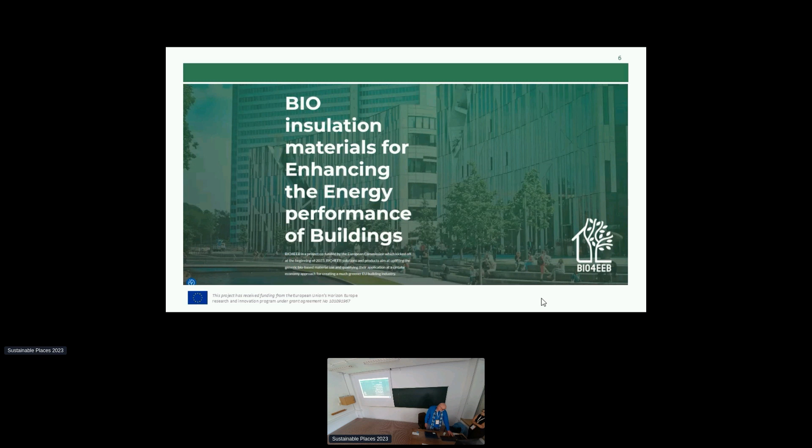The idea is to collect some products. So we have foams, we have windows out of foams, and we are working with Posidonia. Does it say anything to you, Posidonia? Okay. Posidonia is a plant that is grown in the sea between 10 and 40 meters deep. It is nature protected, which is a sort of a problem, because if you want to use it as a building material, how to do this?

Not a problem, because if you remember these old Western movies, there were always these straw balls in the wind, and they just drove through the streets. Now the Posidonia you find at beaches. You see the small collected balls. And the idea was, this material comes out of water, so it has no problem with humidity, which is interesting. If you have condensate in a wall element, for example, this is for sure interesting.

And the thermal insulation is, I would say, as good as regular material, but it's even bio-based. And if it's on the beach and not in the water, it is declared as waste. In that case, what we do here with the Posidonia is upgrading. It's an upgrading solution. We take waste and create typical panels for thermal insulation out of it.

Again, month 6, so what are the technicians doing that are developing now panels and things like this? They are testing, they're combining materials. It's like cooking in the kitchen. New ingredients and just find out what is the optimum solution. It's really promising what we hear, meaning it might be possible that the U value of the thermal insulation created like this is better than of mineral or glass wool. At the same time, fire resistance is not as bad as for the material.

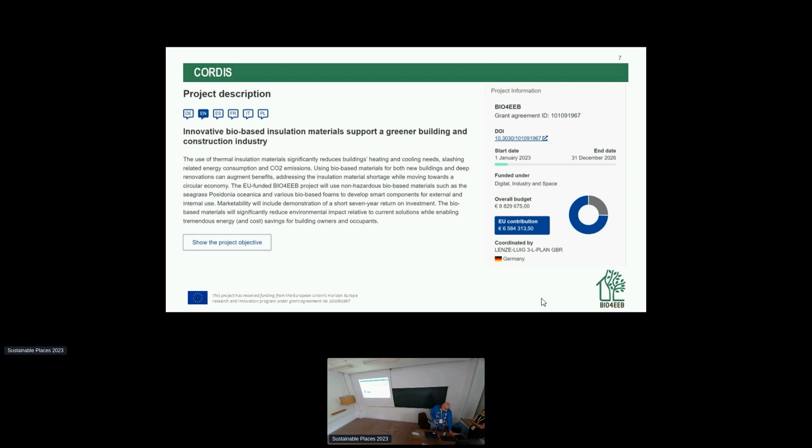It's a dilemma in all the building markets for sure. Certification issues kill you. It takes a lot of time and money at the same time. So we do it in parallel. We have 5 demonstration projects, preferably retrofitting, and we want to prove that these developed products, Posidonia and windows out of bio-based foam, will be directly implemented, and we promise that we have a payback time of less than 7 years, which is ambitious, definitely.

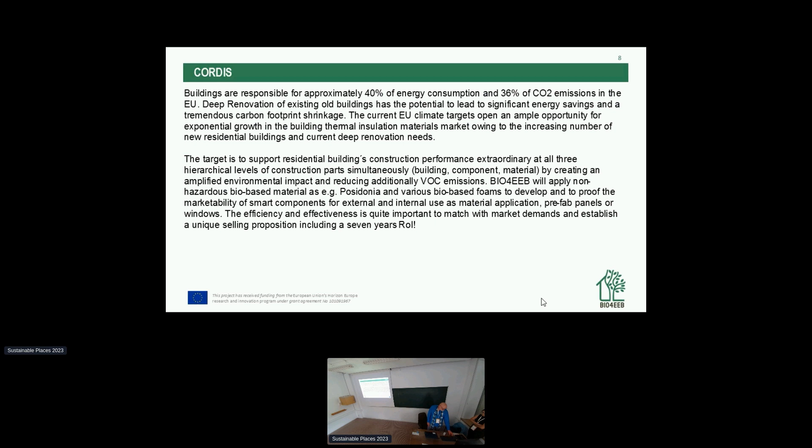And we will cut the energy up to a certain extent, and at the same time, we reduce the VOC emissions using bio-based material, because it's not hazardous biomaterial that we use. So this is more or less the plan. The user centricity, this is very important. Why? Because if you reach the building market with a new product, what we learned is the biggest competitor is the existing solution, even if it's worse than the new one. Why? Because it has to be established, not just in terms of certification.

Architects are looking for references, for example. Even investors look for references. Was it used already? Is it now used for 5 years, better for 10 years? And will it be stable for the whole time? So for sure, we have to be very close to the user experience, user story things, and try to find out what is really moving people to use the material.

Bio-based, I already explained. Circularity, very important, as we are using waste in terms of Posidonia, for example. For sure, we can directly talk about an upgrade of something, and if it is done, we can even give it back to the circle and make the same out of it again. So it's the same level, it's not downcycling.

Decision support system, the plan is to have the storage on a data platform, sort of an e-marketplace. And in this e-marketplace, we will find all data needed for the people that want to apply materials or products. And at the same time, we have an MCDA combined with that, multi-criteria decision analysis, that should help end users and even more sophisticated users like engineers to really find out what is a really good combination in terms of LCC and LCA. These are more or less the fields of action that we have identified for the project itself.

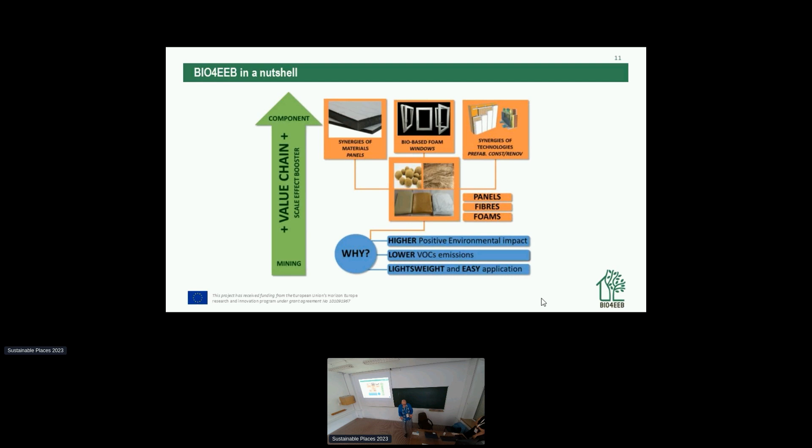And this, because I did not mention it explicitly, is not just for the European hemisphere, but we have an associated partner from Latin America, which is really interesting because we want to really raise the highest replication potential. This is very important even to prove that if it's just a 3% Posidonia share of materials, for example, that you can create and use in terms of thermal insulation, you have to create a huge and big market, and for sure Latin America is quite interesting.

Noticing that the partner from Latin America, Cameco, is really, deeply involved in certification issues gives some extra pressure on us to be in line with the demands of this market.

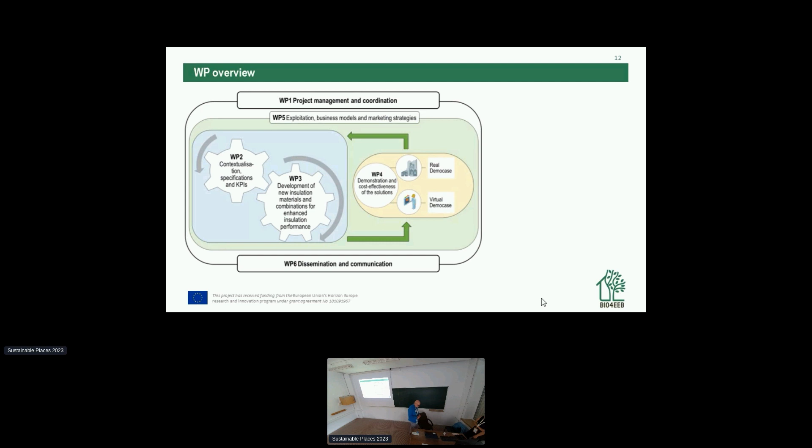Okay, so the demo cases. As I was mentioning before, we develop some material, not having the certification for the application, and at the same time demonstrating, so we're working at 2 levels. Level number 1 is that we have virtual demo cases we use as use cases in order to balance all technical and scientific results against the needs of this project. And we have 5 real demo cases.

And as an interesting energy impact, we add a swimming pool in the garden that is run for the whole year just with PV and heat pump. So an air-to-air heat pump, a really huge one, driven by the photovoltaic, but it's possible. And for sure, we were interested now to apply some products out of Bio4EEB. So for the rooftop extension, just this one here, we take the Posidonia panels, and on this side, the windows on one side are all covered with biofoam windows.

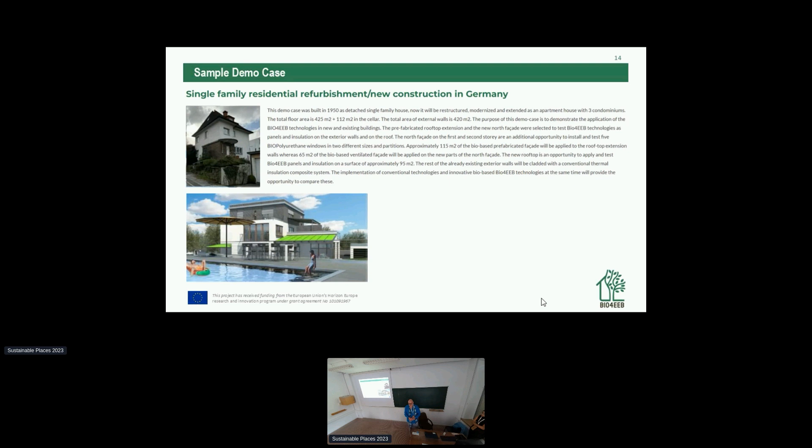So, they are in different geo-clusters, as always expected. There's always a question about environmental impact and logistics. You find Posidonia in the Mediterranean hemisphere. Now you have to go to Norway or somewhere else to demonstrate it. And for sure, this is a discussion that we are aware of. It's a question of ethics of material or component application, and we take care of this.

The consortium is widespread. You see, we cover almost all of Europe, from north to south, east to west, and additionally, as already mentioned, Latin America, which gives us an extra push. Okay. There are some materials produced already. We have a wonderful leaflet summarizing everything about the impact. And the summary here is that we have 30% of what you cannot read and I cannot read, unfortunately.

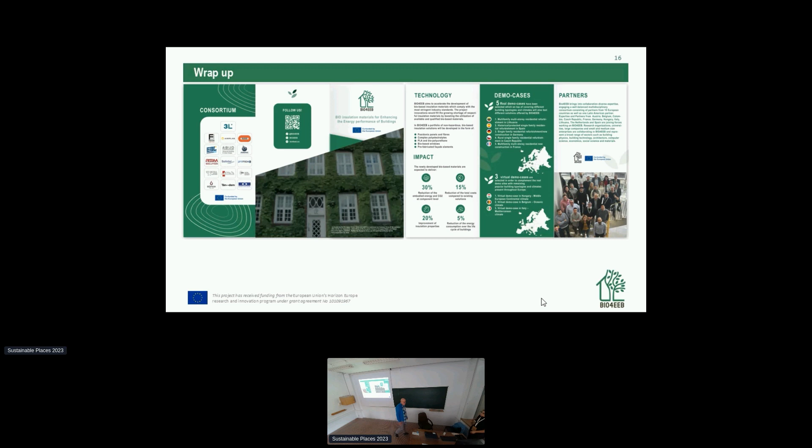But we have a leaflet available. Mostava produced it, and I think he has some to share. Maybe Mostava, we have enough for all of them, so we should just give it out. So it's definitely about energy consumption. It's about costs as well. So the promises are really high rated and will drive us through the project because it's so demanding.

This is the consortium. Maybe you know some of the companies. One you will know for sure, which is R2M. I don't know what they are really doing here, but I have a clue about this. You know that they are doing this conference, and I would like to thank you for giving me the opportunity just to introduce this early stage of the project. And I think we will wrap up at the end and give the opportunity for some questions then at the end, right? Yeah, I think maybe we should save the questions, but if there's any burning desires, I have a

lot of questions. But really? I mean, I'm very curious about any references. You mentioned that that's important. Are there existing references? No, there cannot be existing references. This is a tricky way about this R&D project. Regularly, we would do sort of applied research. So there is a material that has a certification. You do a new product out of it, and you just take care: is the application possible? Is it okay in any kinds of technical or juristical or legal or whatever things, you know?

But this project is tricky because we don't have the product. We develop it in parallel. And this is the reason why we need the demonstrators to build our own references. Out of other bio-based building materials, there are a lot of references. But we think that this is really a totally interesting thing, because the chosen ones have a better performance than the existing ones in the market. And for sure, if we want to be a substitute, and this is the objective, we want to be a substitute better performing, then first of all, make the product, the material, the component as good as possible, and then build up your own references. This is the plan. I'll save the rest of my questions, but does anyone else have?

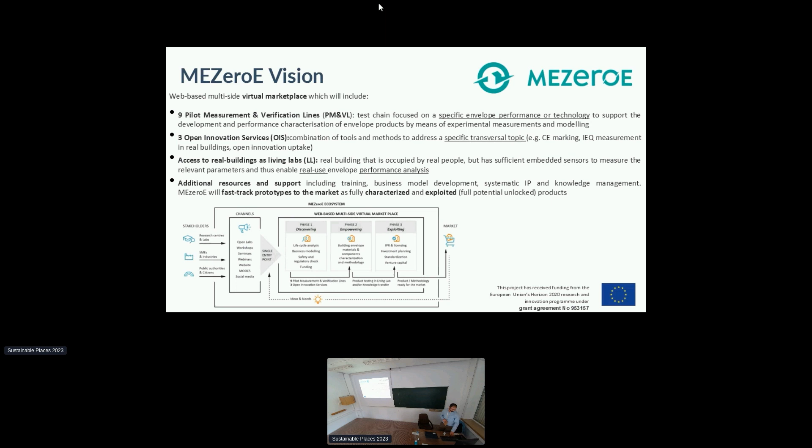The MEZeroE virtual marketplace is a multi-sided digital platform which includes the whole value chain of this ecosystem and includes all these stakeholders in the building envelope ecosystem. So the industrial players, with a specific focus on small and medium companies, the academic research, public authorities, citizens, business experts and investors, and last but not least also some service providers which potentially support the whole process of building envelope development.

So in the end we would like to create a platform which connects groups and single stakeholders and creates matchmaking opportunities.

In practice, how would we like to implement this open innovation approach inside the platform? There is a decision tree being developed by our colleagues from the ICT team, where a manufacturer can enter the platform, set specific needs, and through the decision tree identify which services they need, and also what they need to meet these needs.

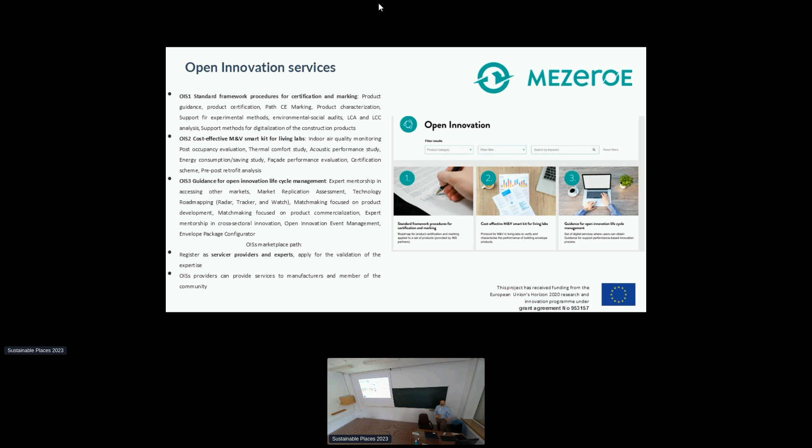There are different types of pilot lines, and there will be a possibility for manufacturers to select the pilot line, and then the manufacturer can request quotations, how much it costs to test a specific product in the pilot line. So this is the idea of the open innovation approach, which should be an exchange of information and enhance the matchmaking between demand and offer in the market.

The path to register for the pilot line owners is in the private area. So you can register yourself. You fill in a form where you add all the information and all the details, contact details, and then you can request to become a client. Or you can also receive requests from clients. Plus, the pilot line can also post news, other types of events, additional information to promote their pilot line and their services.

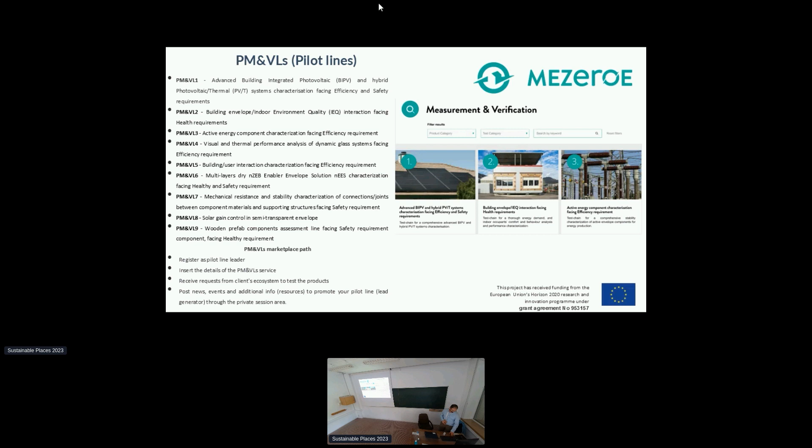Living lab owners: we are also developing the concept of the living lab, which basically are buildings where there are occupants, where they can test each product in a real-life environment. This is not a simple demo site, but in this case it will be more advanced testing. You can register as a living lab owner, insert your living lab in the marketplace and receive requests from manufacturers to test in the living lab. So you have the possibility to test your product in real-life scenarios.

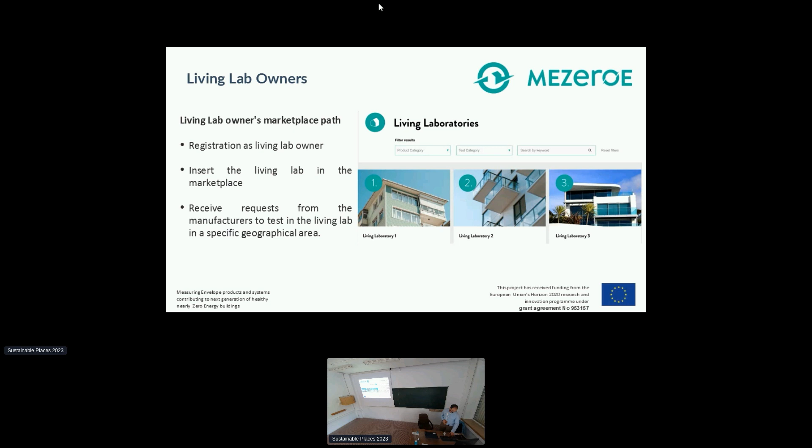Okay, that's the platform. We are developing the platform, and it will be officially published in January 2024. But at the moment, the idea is to recruit the ambassadors of our platform. So we will develop a training in November, December, in the second half of this year for the ambassadors.

The next step will be to have the early adopters, which are experts in a specific domain, in order to create a critical mass in this open innovation ecosystem. The idea is to populate this marketplace together in order to meet the demand and offer of the sector of building envelopes.

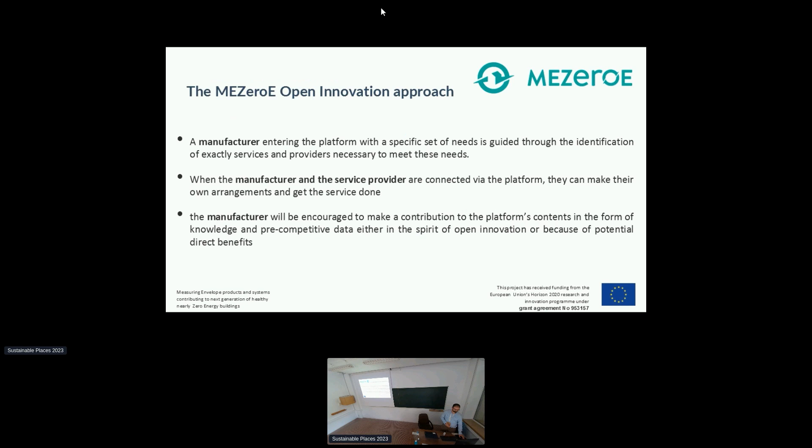I think what may not be clear to everyone is that one of the partners, I think the same partner in BIOMAT for EEB, is developing panels, because you didn't touch on circularity or bio-based anything. So what is the link? Is this open to producers of circular or bio-based solutions? I don't understand the link with this workshop specifically.

We would like to have the ecosystem approach. So we have the big networks that can have some circularity, some reuse and recycle after the project. This is why we have this platform as well. For the manufacturers that register in the form, there will be a potential path for circularity in their product.

The overlap is the platform itself, because MEZeroE is focused on building envelope products, and BIOMAT develops insulation and prefabricated facades for the envelope itself. So this is the connection between BIOMAT as building envelope bio-based product and MEZeroE, which involve both partners and both projects. Thanks. Any other questions?

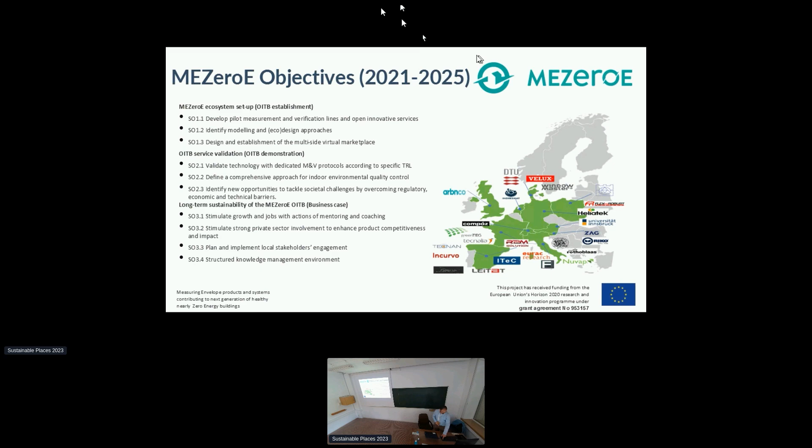All right, I think we have one more, and then we'll do Alessandro, and then we'll have a discussion.

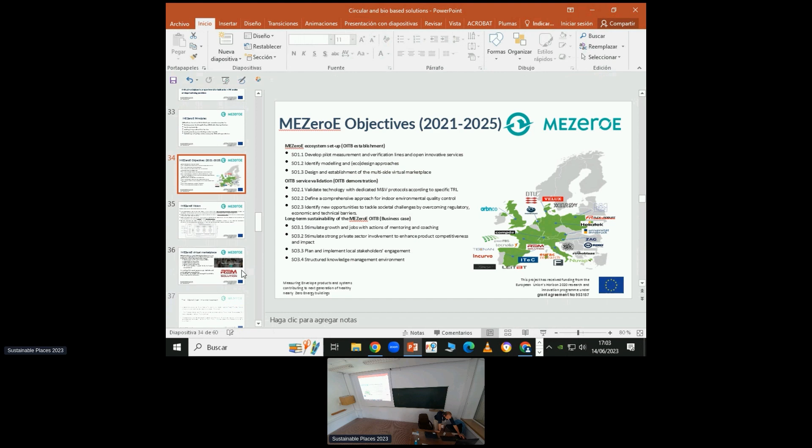In CE4Con, Circular Economy for Construction, I'm going to introduce a possible solution to target data about circularity and understand if the product designed as a complex system can be understandable during the design stages. Can the information be shared among different players in the different stages of development to provide data of the final result to the user? Brief outline: the context, CE4Con objectives, then testing and further development.

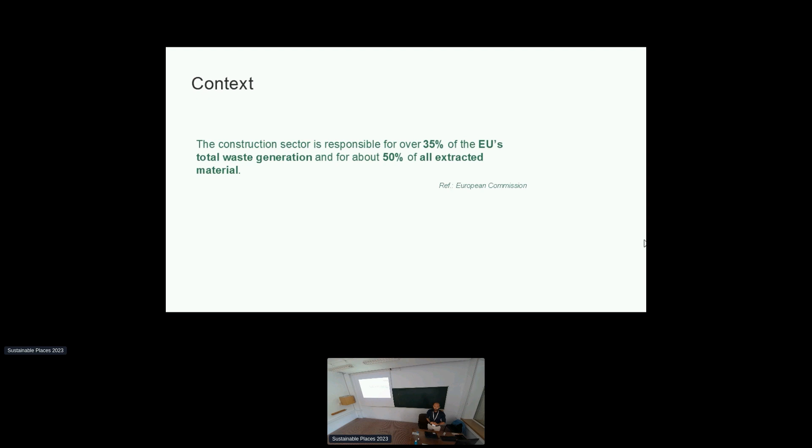So, the first point, why we work on this aspect. The construction sector is responsible for a lot of waste generation and extracted materials. So the construction sector needs to work to reduce this. All the mining activities that Klaus just mentioned can come from waste, as Posidonia can be considered, but also from the building itself.

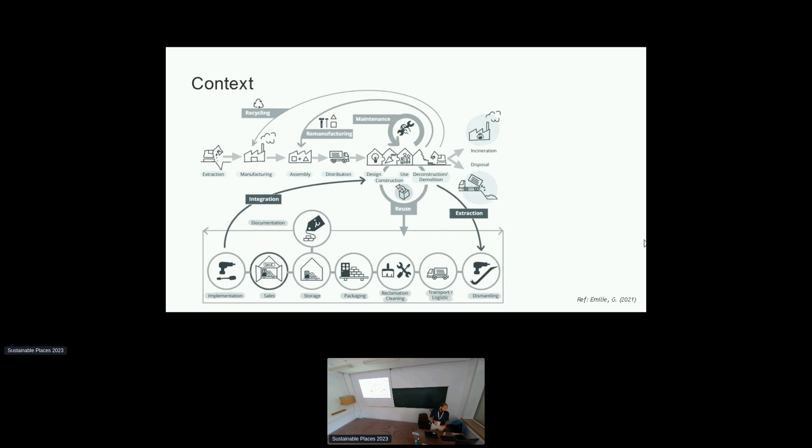In this scheme, we show more or less what is the expectation in the building industry about circularity: materials used for construction that can have a further life after the end of life of the building itself, and can be recovered somehow. Why this? Because mining raw materials, prime materials, means consuming more than recovering material from dismantled buildings.

It's fundamental with this approach to start designing new products to support it. Demolition materials are part of the problem now, because they are disposed of in the majority of cases. We need to start sourcing from these waste materials from construction and recover them in different systems. And last point, work with specific stages to boost an accurate and selective disassembly process. This is crucial.

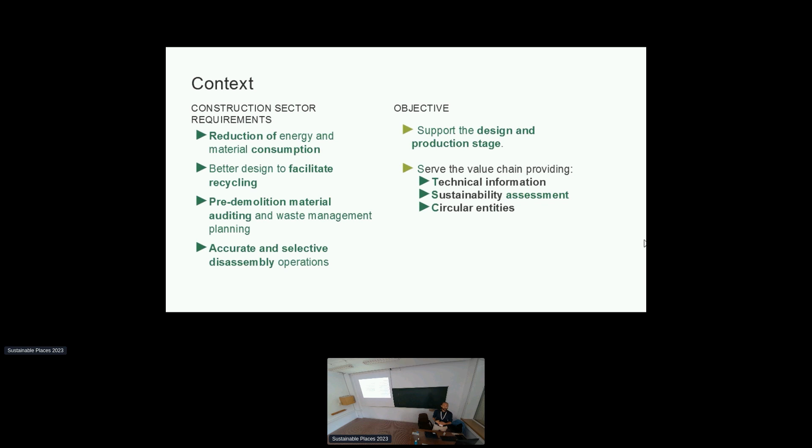So here comes the objective of the project: to support the design and production stage, to understand better these parameters, and to serve the overall value chain in the construction sector, specifically at building level and facade, to provide technical information, sustainability information and assessment, as well as understand the circularity of this project. Here comes CE4Con. CE4Con is a funded project within the open call of the Kiklos 4.0 research project. It's a very short project, 8 months.

We are 6 months in, but August will be the last month. So we are in the middle of all the integration. And the expectation is to use 2 existing software provided by the partners, a platform for circularity and augmented reality software, to be integrated with tools coming from the Kiklos project, in particular related to the manufacturing activities for facades. So a PLM, an LCA assessment tool, and blockchain.

Here the partners are Focchi, a facade company specialized in bespoke high-technology facades, so we try to design each product from scratch. Holonix, an ICT company providing one of the platforms, and Materially, which is specialized in product impact, sustainability, LCA, and these aspects.

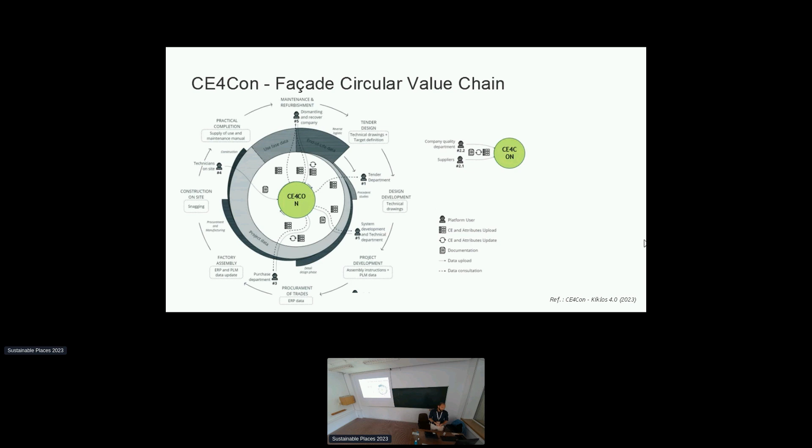There is the facade manufacturing itself, with energy consumption, cutting machine activities, production line, outbound logistics, and so on. And there is the installation, the maintenance of the facade, and the end of life. All of these stages need to be considered when designing the facade itself. And with CE4Con, the platform aims to target some specific stages, the designing activities and decision phase, to support the definition of the best impact to boost circularity.

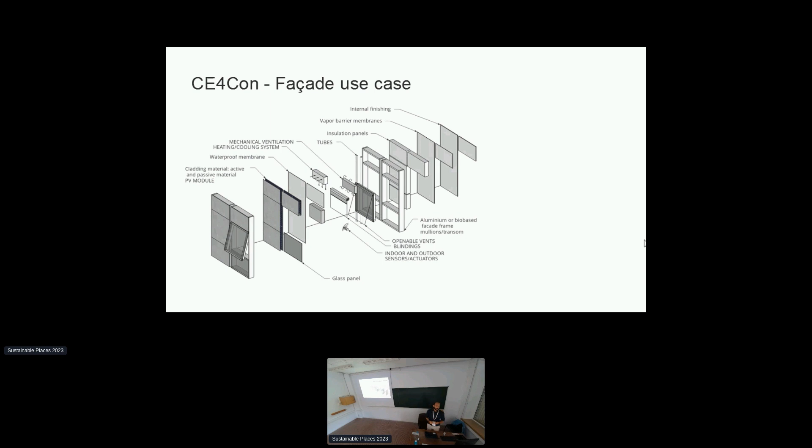To achieve this final prefabricated component, there are a lot of different layers. There are more or less 100 components within a prefabricated facade. All these components, their circularity, sustainability, and environmental impact, need to be known, and the information tracked during all the value chain. And this is the use case.

So the facade as a complex system becomes a circular entity. This is the basic unit we implement within the platform. So all the components are tracked as single components, and together they contribute to the circular entity that is the full facade.

Each component of the circular entity facade is a circular entity itself, because considering a profile of a facade, this profile needs a bar to be extruded or pultruded by a provider, needs to be cut, machined, and treated before the installation. So it includes a lot of information related to circularity, supply chain, impact, and so on.

So each circular entity brings attributes. Attributes include material with density, specific GWP of the materials, recycled content, or recyclability opportunity at the end of life, and all these attributes need to be defined.

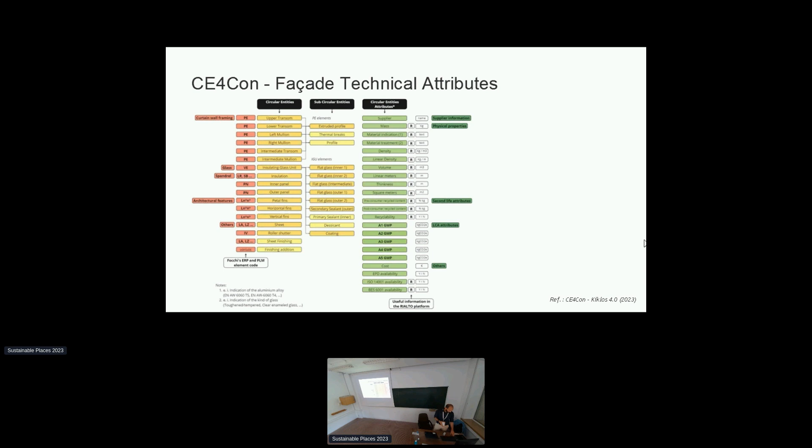We need to track the carbon footprint of the component. Let's take from an LCA database the specific information for that specific material. Then calculate with all the materials the final LCA of the facade, providing information in the database itself as a possible solution for further activities.

But also, this information can be shared with a blockchain instrument. The blockchain aims to provide an immutable quality check of the data, so nobody can change it. Once the data is inside, the blockchain can guarantee that this data cannot be changed.

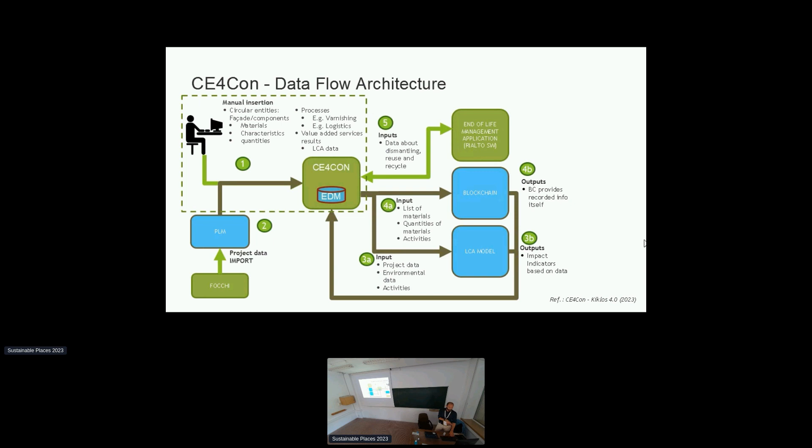So, focusing on this part, because the other parts are ongoing under implementation, I'm going to show you briefly how it works, the data input within the platform. This is the CE4Con platform.

The platform gives the opportunity to collect data for all the circular entities. So the facade as circular entity is defined. Each facade component defines other circular entities. So a circular entity for insulation, a circular entity for profile, a circular entity for gasket, a circular entity for metal sheet, and so on. Each circular entity has its own attributes.

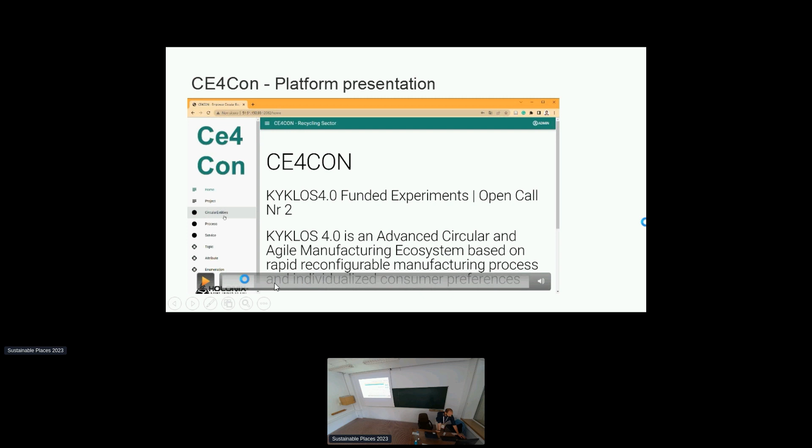Attributes mean... does not work, no problem. Reset it. Here we are.

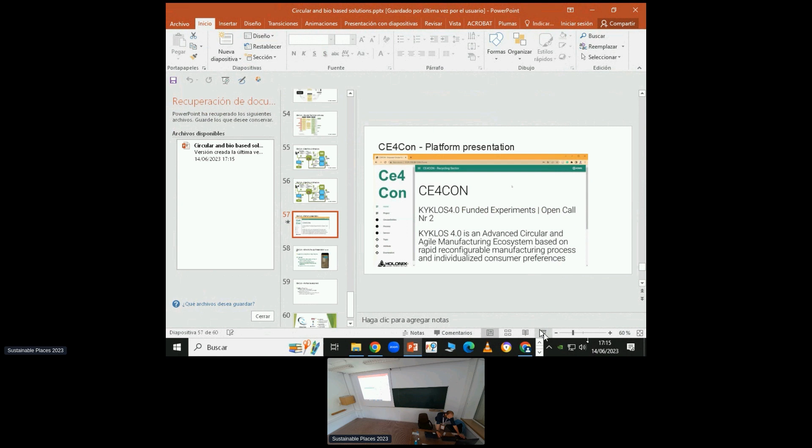So the platform helps to keep track of this information. Now tracking, let's say, mainly in a manual way. So the idea is to introduce this information differently.

Yeah. Okay. We'll present you the video another time, not working now.

Finally, the information can be tracked at the end of life. So thanks to augmented reality, the idea is to support the dismantling of the facade or other building component systems, addressing what the components are and where they need to be disposed. So I, as a dismantler, can identify that component thanks to augmented reality and the relation between the BIM model and data from the platform: steel, that is the steel part. Aluminium, aluminium. Insulation, insulation, and so on for everything.

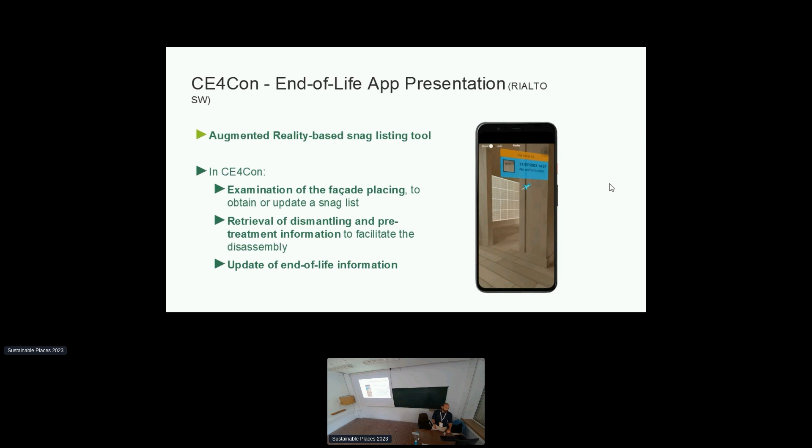So also the platform and augmented reality can support end of life information tracking, because the problem with buildings is that they are single prototypes, they have a long life expectation, luckily, and after all this time, this information risks being lost. We are speaking about a lot of information now, but how to keep this data over time will probably be the question for the next years, because we are speaking about buildings with a life expectancy of 50 years. So in 50 years, I hope to be retired, so I cannot provide information about the buildings, but this information should be available somehow.

So, integration with the tools to understand LCA, to track technical information by PLM, and Rialto for augmented reality. And validation in a pilot scenario, the case of facade. So we're going to validate it with the existing facade system and see how it works or not. Thank you.